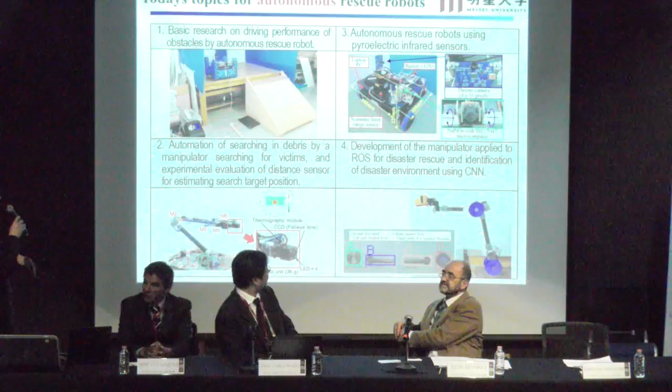In the future, research and development of autonomous rescue robots is necessary. Today's topic is autonomous rescue robots - four topics I will explain. The first one is basic research on driving performance over obstacles by autonomous rescue robots.

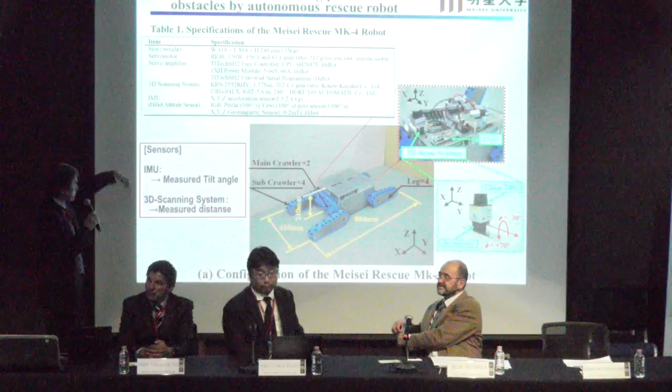This figure shows the configuration of the rescue Mark IV robot. It has sensors: an IMU that measures tilt angles of the robot, and a 3D scanning system that measures the distance from obstacles.

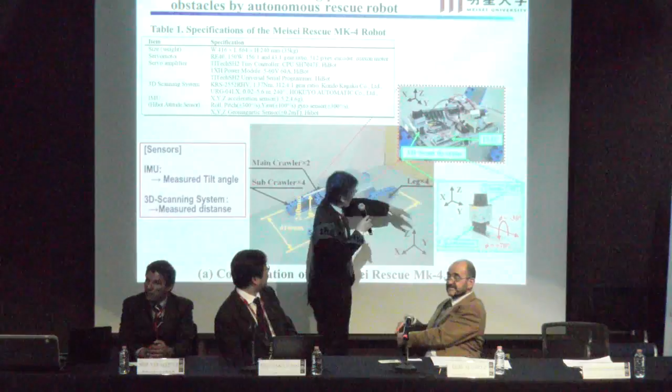This is a 3D scan system, and this is the scanning sensor.

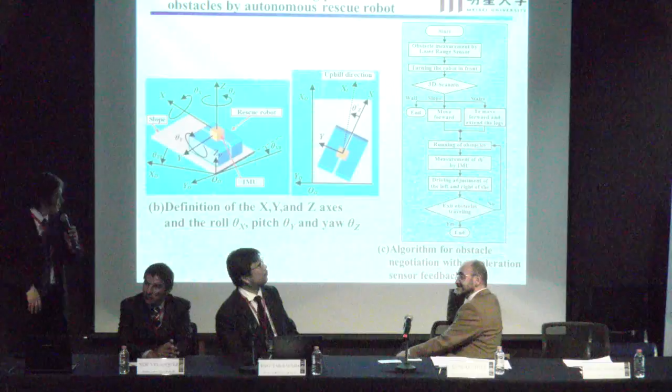This figure shows the definition of X, Y, Z and rotation. This algorithm shows the autonomous climbing algorithm using the 3D scanner and IMU sensor.

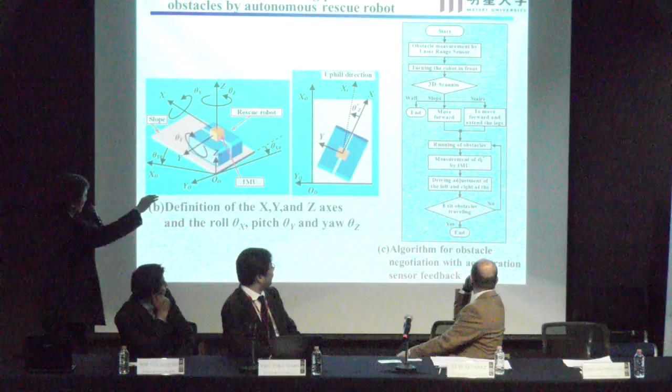This movie shows the basic research on driving performance over obstacles by autonomous rescue robots. In this case, we use the IMU, but also without IMU control. First, the 3D scanner measures the slopes and decides the slope angle.

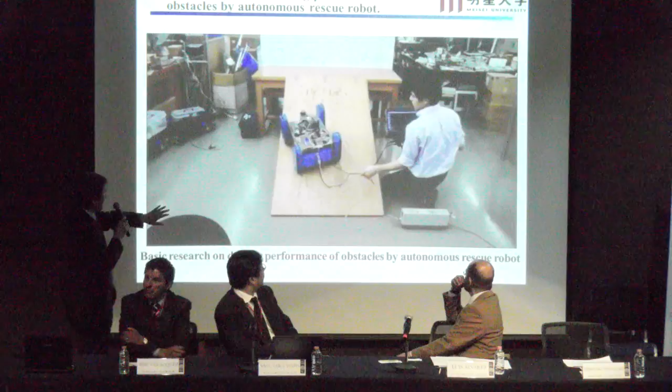Next step, measuring 3D data. Next step, climb the slope. But in this case, we do not use the IMU - it sweeps, then turns to the left, and finally drops from the slope.

Then we try IMU control to automatically compensate the direction. He is my student, he is holding the computer but not operating it - it autonomously compensates the direction to climb the slope.

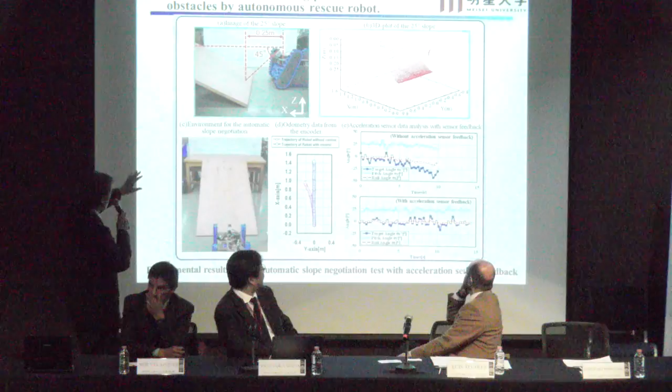This is the result of the experiment. Next, we try going from the top of the stairs down.

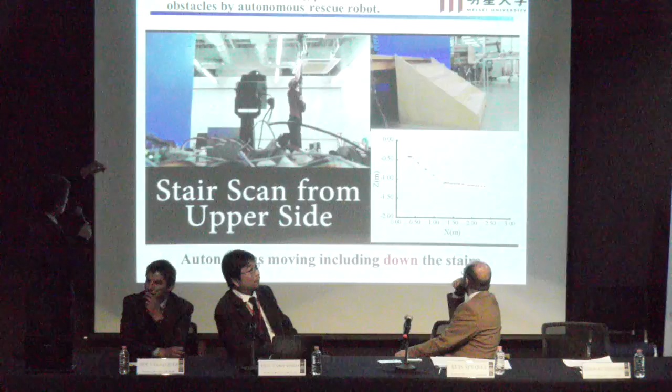This is shown 20 times quickly - autonomous moving using the 3D scanner, measuring from the top to the bottom of the stairs and the form of the legs.

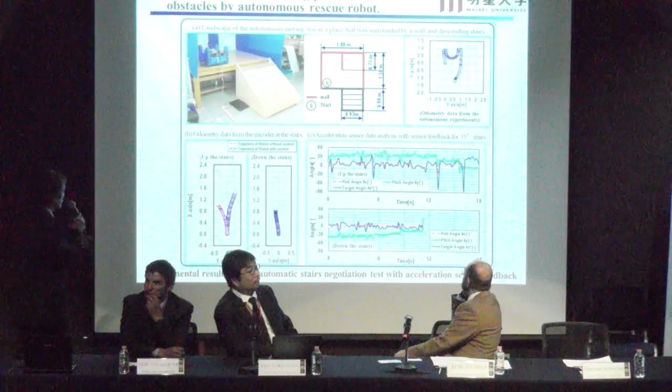And this is real-time data. This is the result of the autonomous stairs descent, and this measuring data is very good.

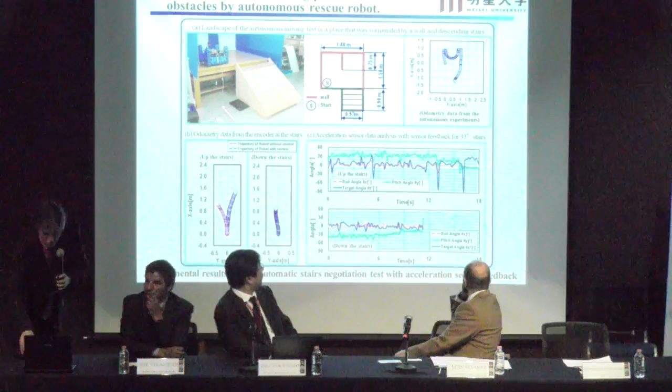I will now show the second topic. This figure shows a manipulator developed at Meisei University. The title is Automation of Searching in Debris by the Manipulator, Searching for Victims, and Experimental Evaluation of a Distance Sensor for Estimating Search Target Position.

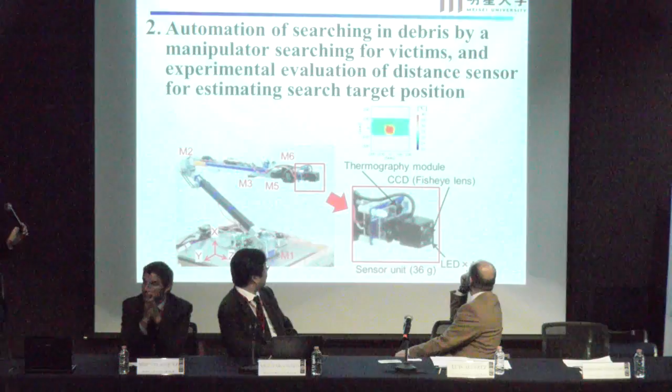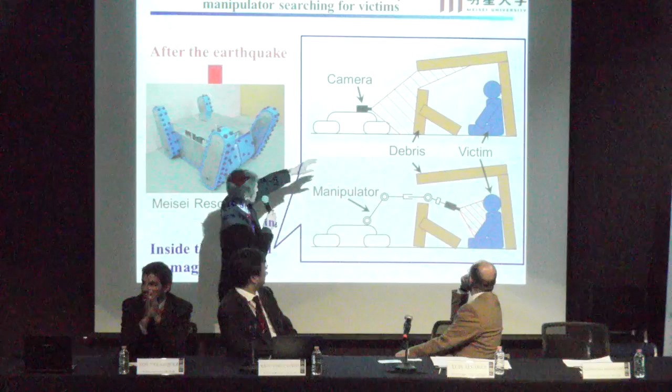After an earthquake, if we use a rescue robot inside a damaged building, in such cases only a camera makes it impossible to look inside the debris. If a victim is inside the debris, it is necessary to use a manipulator.

In this case, the rescue robot and control PC used wireless LAN control. This is a simple example with a box. The problem is we cannot recognize depth, only two-dimensional data visualization.

It is very difficult to manually insert the manipulator quickly. As a solution, we proposed using a distance sensor to automate the insertion operation.

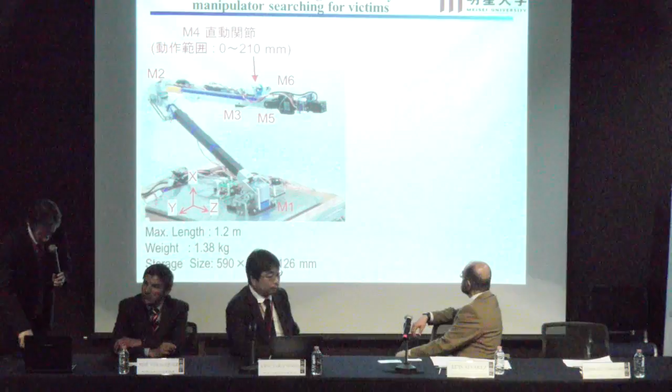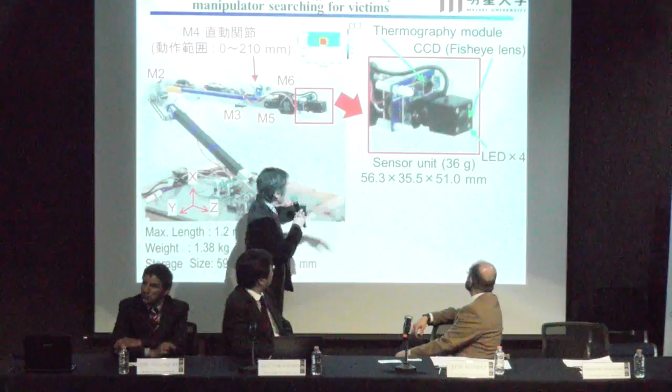This figure shows the 6 degree-of-freedom manipulator, weighing 1.38 kilograms - a very light manipulator. The head has sensors including thermography, which can measure temperature.

The sensor unit is only 36 grams, with LEDs numbering four. This is the scene of examining and scanning the holes.

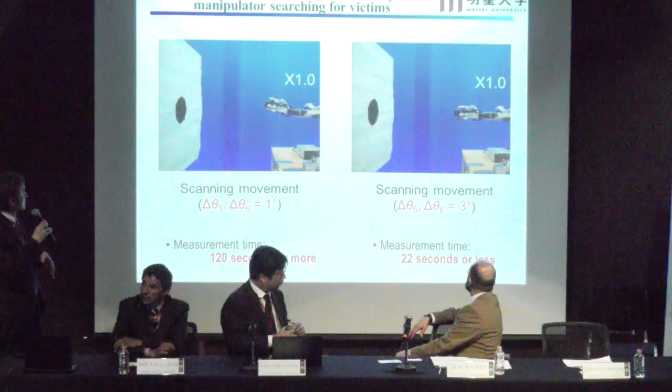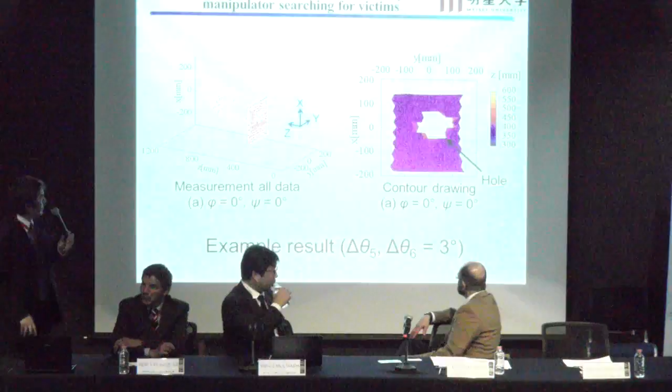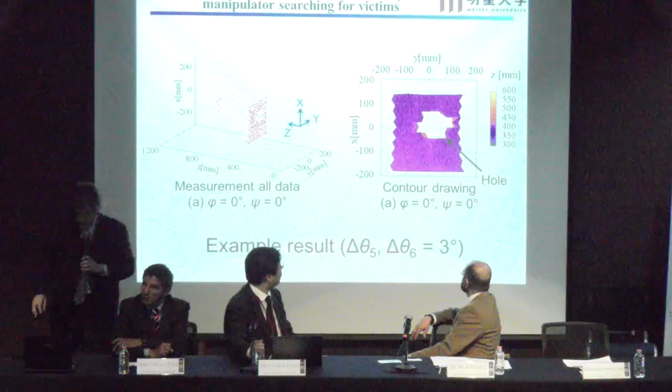In this case, in about 22 seconds it is possible to search the holes. This is the result of the measured data - we can see the hole. Next, we try to autonomously insert the head.

In this case, a distance sensor looks for the surface and autonomously finds the hole, inserts the head, and tries to reach the victims.

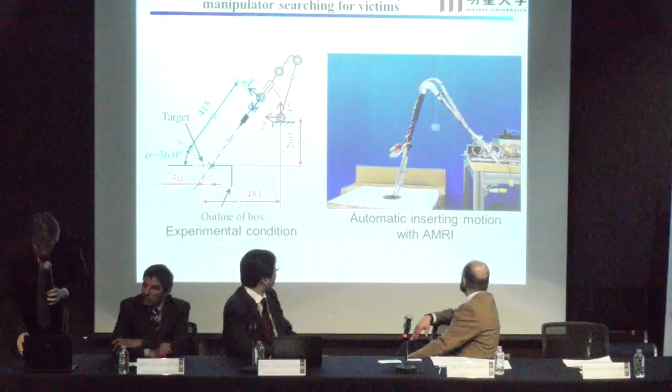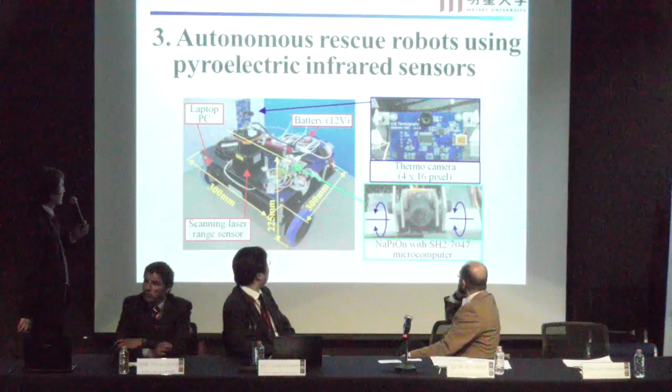This is an outline of the rescue robot, and this is a thermal image. Here are the hottest spots, but it is difficult to analyze only this data. We propose the pyroelectric infrared sensor to detect a wide range at once.

For a quicker find, we try this approach. This is a heater, and this is the autonomous robot using pyroelectric infrared sensors.

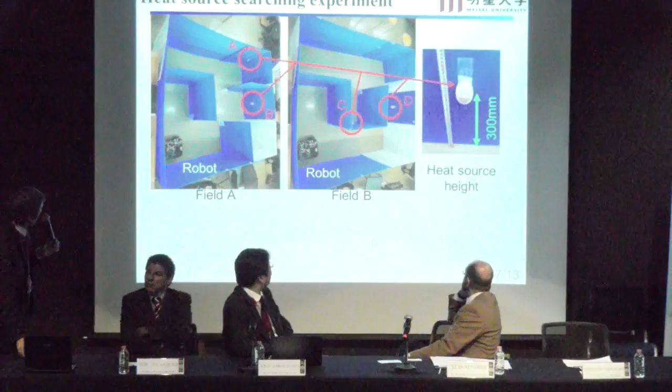First, we tried a maze like this, attached a heat source, and looked for it using this autonomous robot. The result is here.

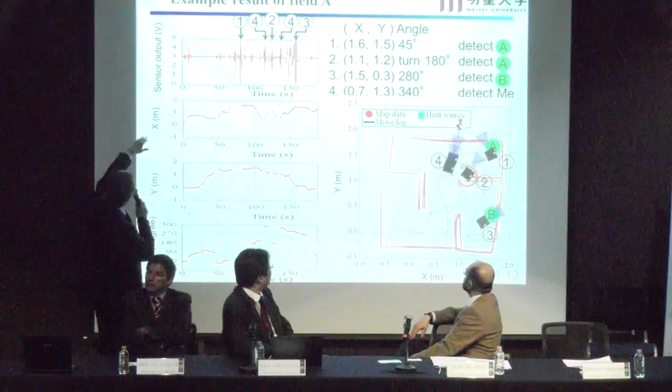The first graph shows the sensor output, numbers 1 through 4, which are heat sources. This figure shows the red dot as map data, and the blue line shows the move log. The result: detect heat source A, detect source A again, and detect source B.

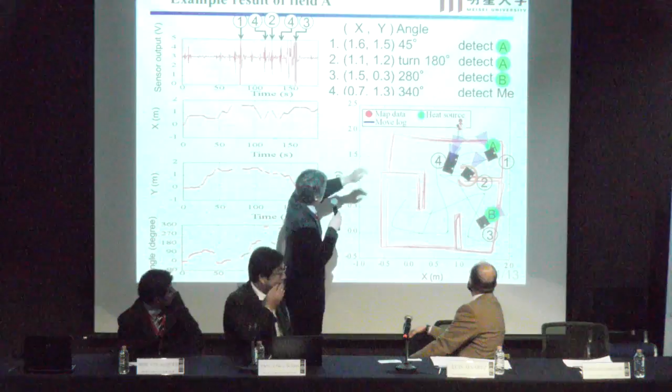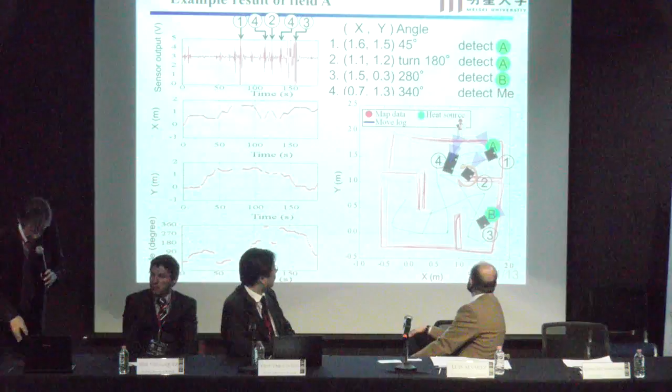And in this case, it's me. I explain here, and the robot finds me.

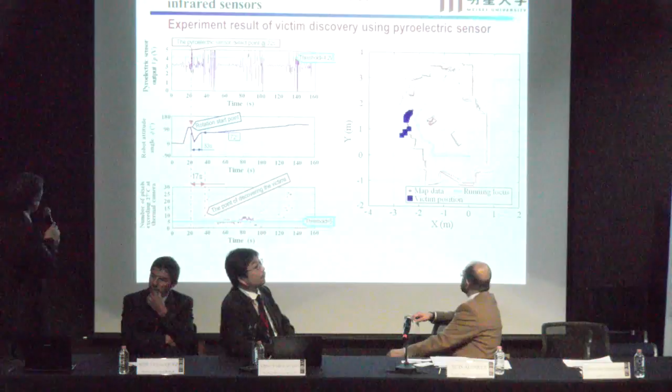This figure shows the result. Time is short, but we detected victims 17 seconds earlier than using only the thermal camera.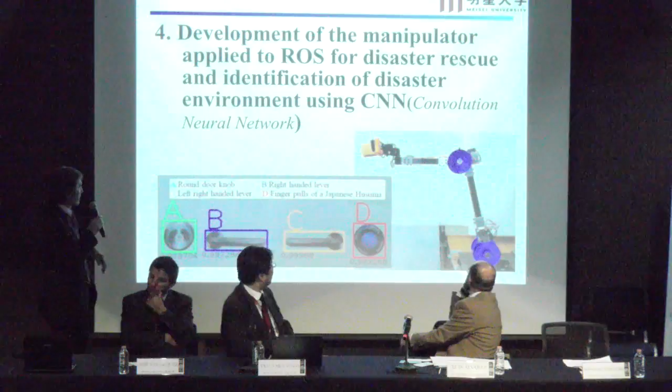That's the result. Topic number 4: we try using machine learning, in this case CNN, to distinguish the door knob.

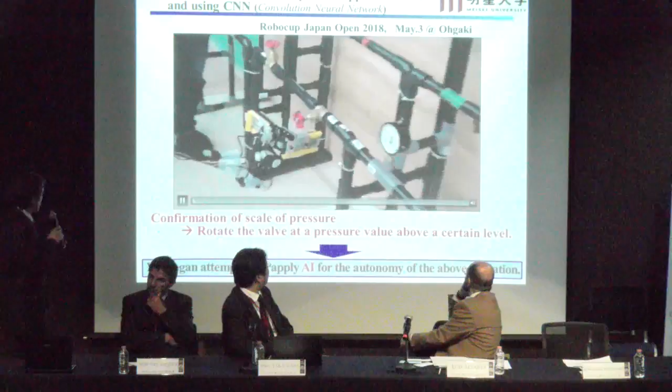This movie shows the RoboCup Japan Open 2018 this year. This is the meter and valve.

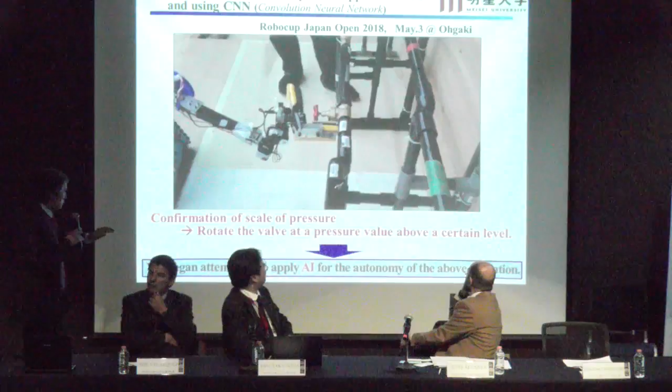In this case, confirmation of scale of pressure, and then rotate the valve, when the pressure value is above a certain level, we try to use AI.

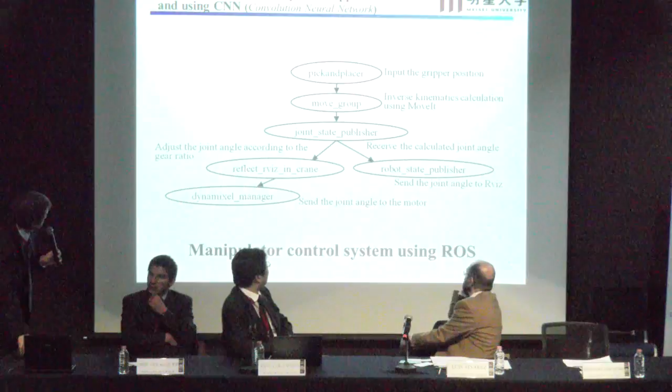This is developed, and this is the algorithm, using ROS moving autonomously. The operator uses the simulator, and the real robot moves like this - very easy.

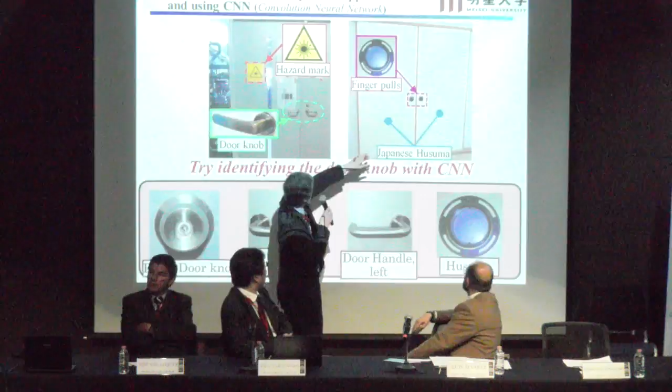This shows the doorknob and Japanese style door, that is husuma, which is sliding. And this type is pulling.

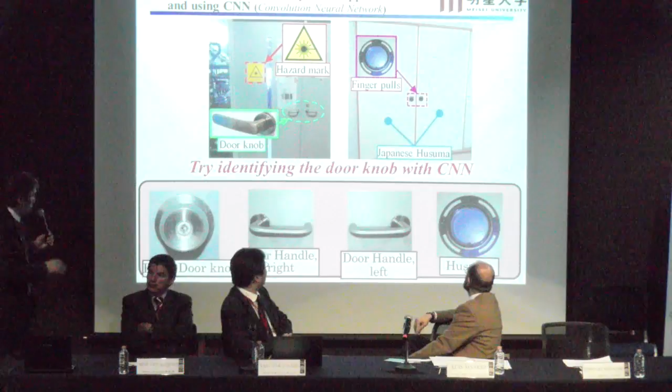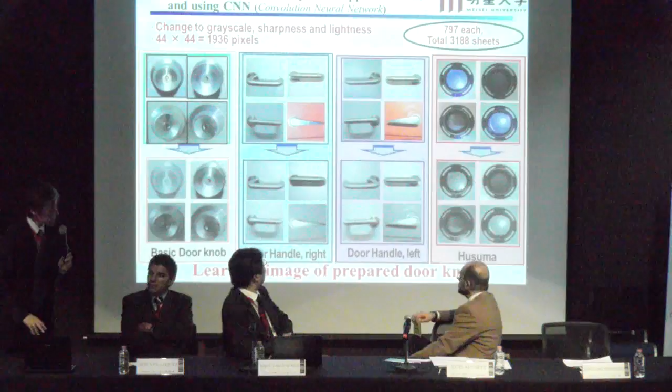A very simple algorithm was applied, and this photo shows the learning images of prepared door knobs.

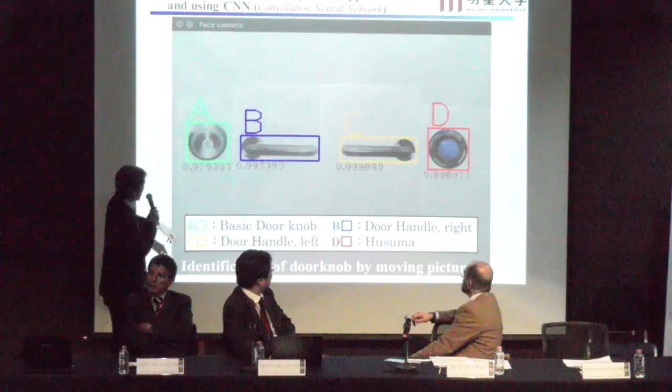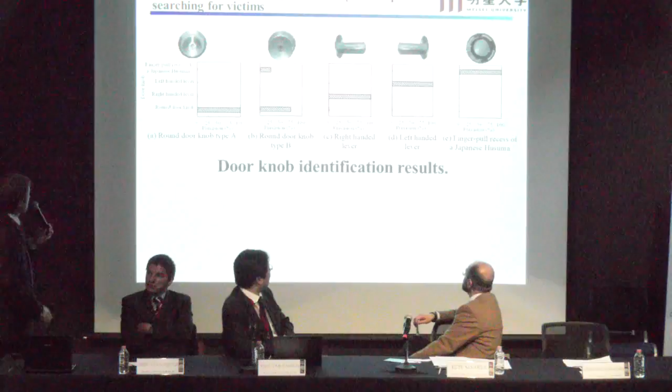All data over 90%, distinguishing A, B, C, D query. This is the data over the result.

Conclusion of today's topics: autonomous rescue robots and artificial intelligence will become indispensable in the future. Still, we are at the beginning of the study.

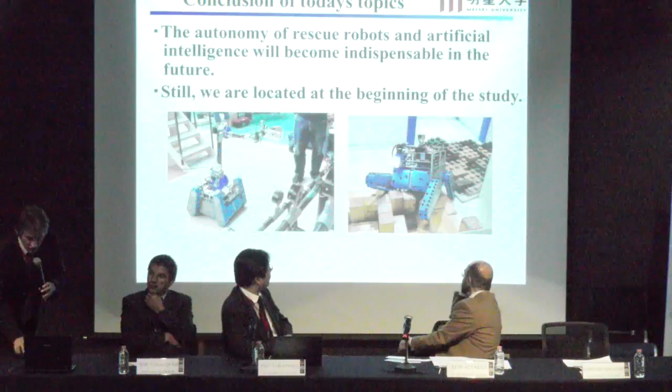A Meisei University rescue team will attend, and from Mexico, Universidad Tecnológica de México. After tomorrow, I go back to Japan to attend this World Robot Summit.

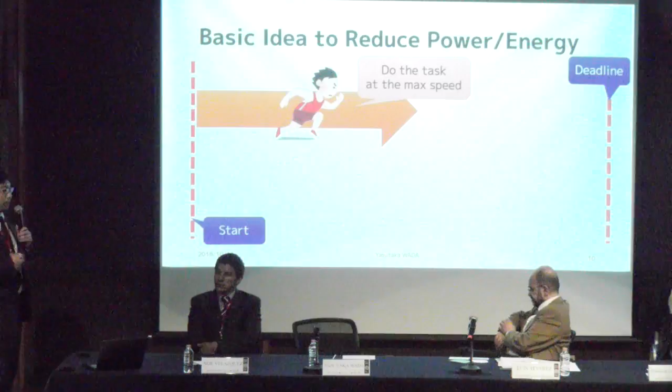Let me show you a basic idea to reduce the power consumption of a computer system. One idea is to execute the program at the maximum speed of the system, and then rest until the given deadline. That's one case. Another case is to make it slower, while still keeping the deadline of the task. This is a simple case, but it's a very important strategy for reducing power or energy consumption. Using a compiler system, the compiler can analyze the program and search for the opportunity to do this kind of thing, applying it while parallelizing the program.

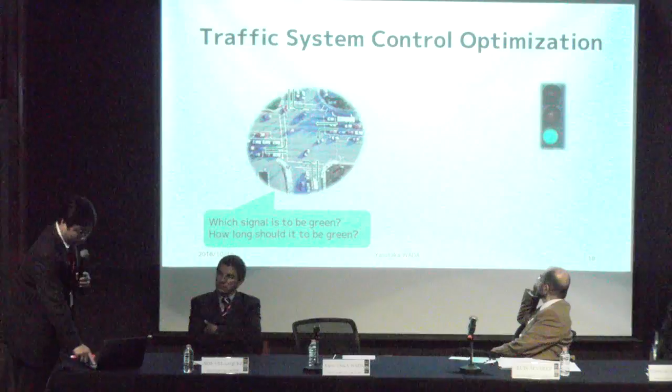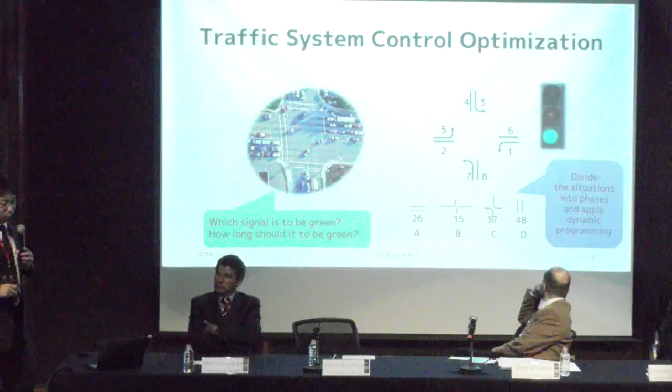In this case, we utilize dynamic programming methodology, so we can divide the situations of the traffic signal into phases, and we name each phase. By using this phasing technique, we can apply the dynamic programming technique, and also algorithmic optimization for the optimization program.

So we can achieve much better performance. If we don't apply the optimization, the complexity of the problem is exponential, but after applying our technique, the complexity becomes more linear, so it's very good performance.

In the near future, we have to make full use of these kinds of computers, but all of them have their own functionalities and characteristics. So we have to think about which kind of program we want to execute on which system, and which kind of tasks should be assigned to which system.

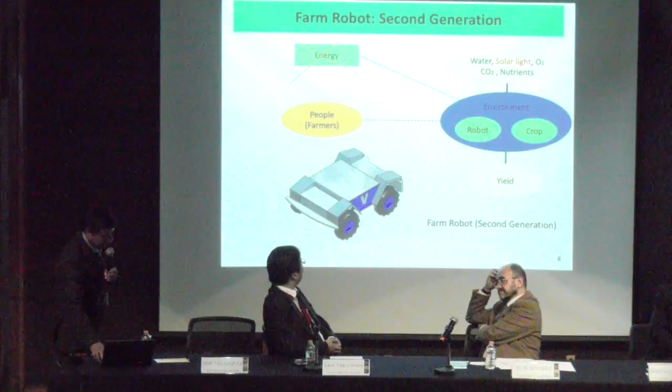The second generation of farm robots is this one, where we already took away the fossil fuel energy, and we use the same energy as the crop, the solar energy. Then we power our robot with this energy, so in the same environment we have the robot and the crop, and also we put in other things like water or nutrients, and we can increase the yield. But here the farmer, or the people, is just an observer of this process. What is the idea of this process?

As I mentioned before, the idea is to use the same energy that plants use to grow. We power our robot with solar light energy, and as there's more light in the field, crops grow fast, but weeds also grow fast because of the good light conditions. So the robot can go inside the cultivation and cut small pieces of the weeds, and these pieces go back to the soil, where they decompose with organisms into organic matter, which helps increase the yield.

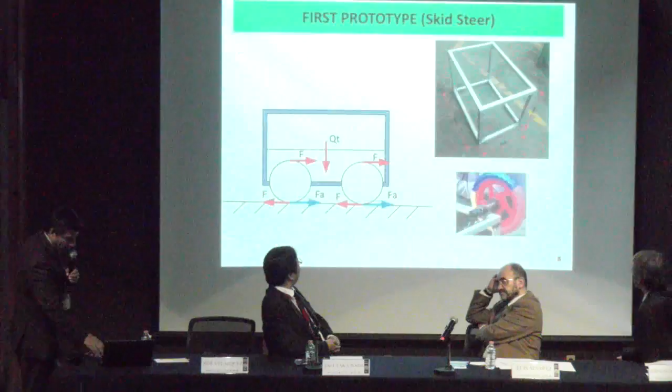With these ideas, we started developing this robot in 2014 at Chapingo Autonomous University. It was a basic robot because we had no funding at that time, so it had to be as cheap as possible. Even the students had to buy the motors and everything themselves.

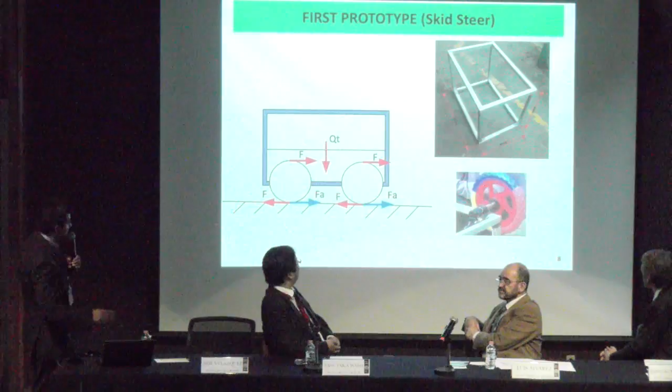We did some simple calculations of how much load we could carry and how much thrust the engines needed to move, and then started building it. We tested some drivers, since our background is agricultural engineering, not electrical or mechanical engineering. So we started from the basics: how to turn on the motor, how to change its direction, how to increase velocity, and how to reduce velocity.

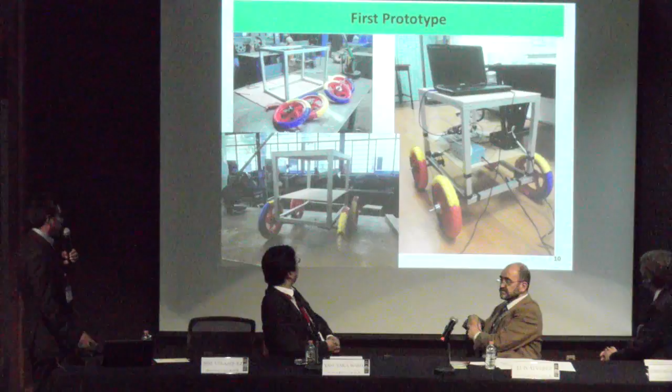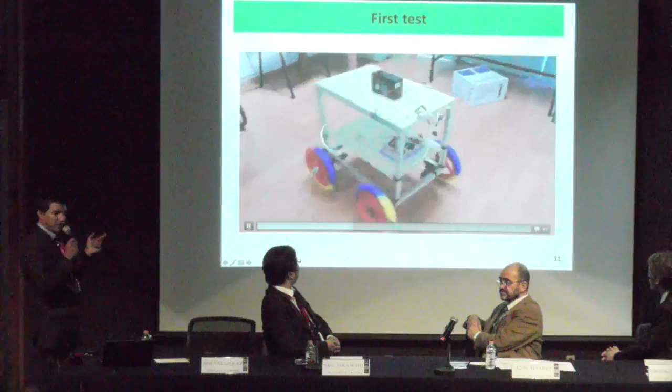We came up with this first prototype and decided to use a skid steer vehicle, which is very easy to control because there's no steering direction needed - it can turn very easily on the same axis.

At this point, it moved, so we took it to the garden at the faculty. It should turn faster because one side's velocity is slower than the other, but as you can see, there wasn't enough power to move it properly. From this first step, we got recommendations: use more efficient motors, reduce the size of the vehicle, improve the mechanical design, and so on.

We're also using the MPU and the IMU, as the Professor mentioned in his rescue robot. Our sensors are actually very similar.

So we came up with the design and construction of version 2 of the robot, also with no funding, because in Mexico it's very difficult to convince people that we probably need this technology. We decided to design, construct, and evaluate an autonomous vehicle for monitoring and agricultural work.

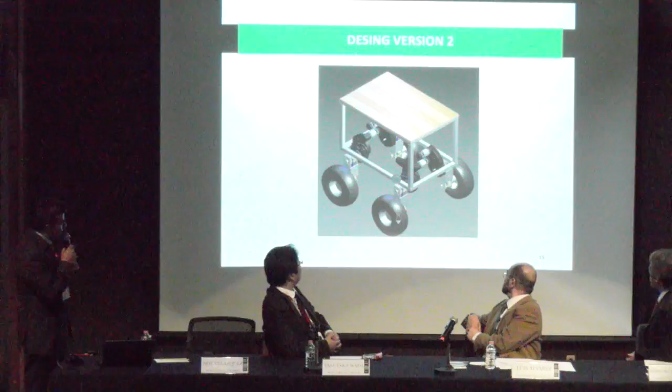Here's the design. The main feature is that we put the motors in a head position, and then transmit the power to the tires by a chain. We went back to the field and reconstructed everything, making some pieces especially for this robot.

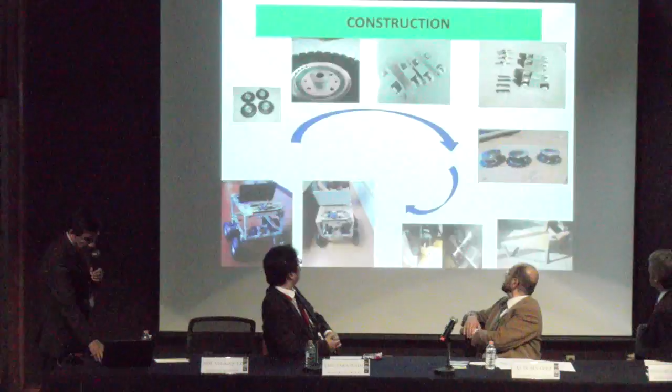This is the main control. The motors you see here are actually from power wheel toy motors, but these are very good - they're 80-watt power wheel toy motors with a reduction gear that allows for torque, so the robot is very powerful. We're using Arduino because it's very cheap and very easy to get here.

The main thing we're using is a computer vision webcam that allows for autonomous navigation. Here's the algorithm - I'll go further into this navigation later.

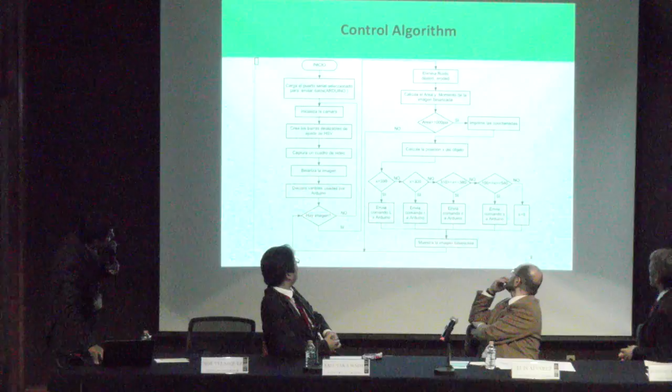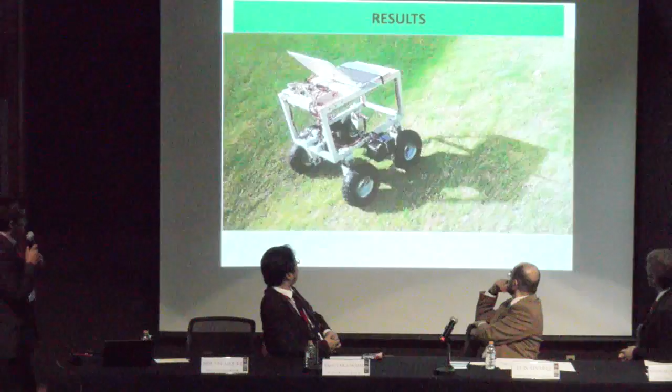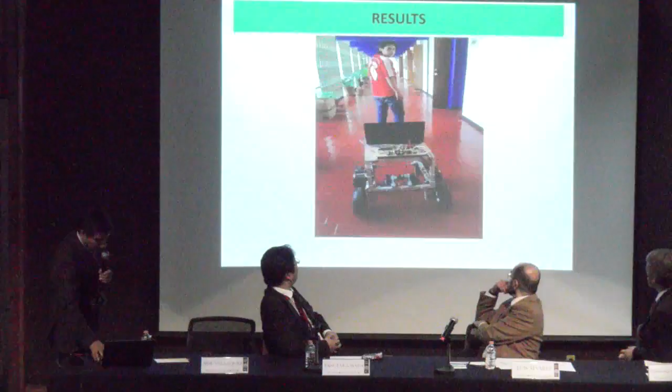Once we developed this, we could start developing mechanisms and implements for agriculture and labor. The first thing we did, because it didn't cost money, was an application for following someone.

We're not controlling the velocity of the robot - if the guy moves too quickly, the robot will lose him. So right now, it's just following with programmed velocities, but it's working quite well. As I said, we're using the webcam of the computer for this task.

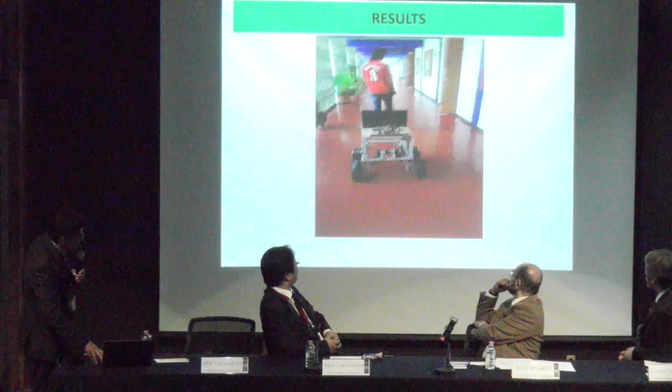Then, as I said, we came to the implements: a computer vision system for disease detection in some cultivations we're working on right now, spraying for pesticides and fungicides, and application of alternative energies in the robot.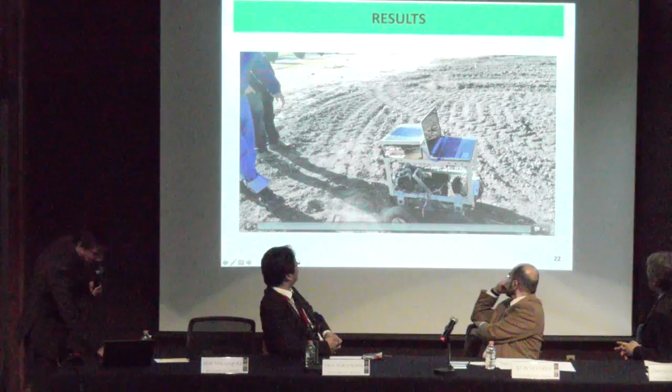And as you can see, it didn't work. Everybody was very worried, especially the student going in front of the robot, because you can see it's not tracking well since it's a rigid system, and we already have a seeder machine installed in the middle part. You can see his worried face because he was working on his master thesis and we had to start over again.

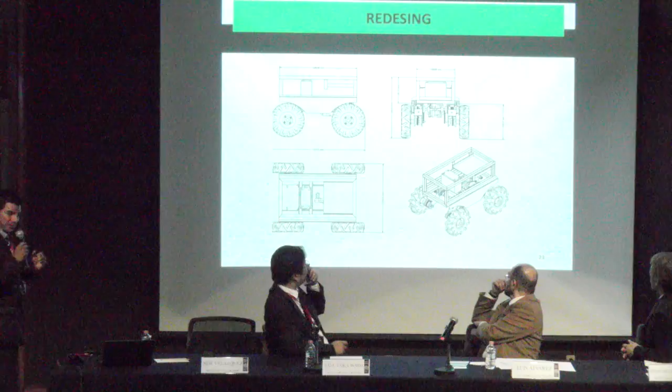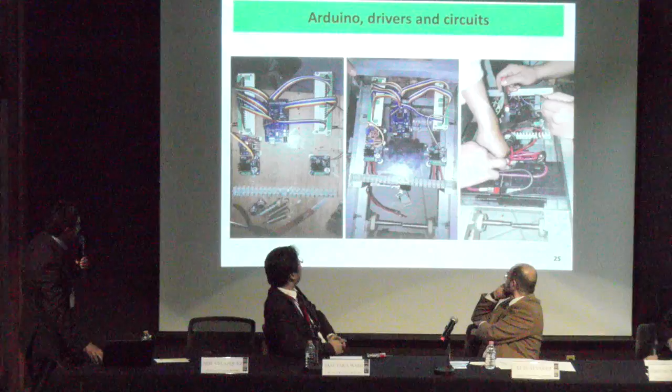This shows that we were doing something wrong, so we redesigned everything. We put in suspension and 4-wheel drive in the robot. We started over again with the circuits, and we came up with this third prototype.

We also changed the tires, so these are agricultural tires, special for agriculture. And of course our pets over there. But as you can see, we don't have problems turning now, and it's moving very well in the field. That's why we wanted to make this. It took us 3 years to get to this part, especially in the mechanical design, until we came here.

We also worked on the mathematical model for controlling velocities of this robot. It's quite easy because this robot is considered rigid, and we don't have changes in mass position in the robot, unlike the one I previously showed you in my first slide. So this is the mathematical model for controlling this robot.

Then we developed software to autonomously navigate between corn or between any cultivation. We are using a webcam, as I showed you before, and now you can see the suspension working very well. It's independent suspension in this robot, and it's navigating autonomously between the rows of the cultivation.

The main point here is that our vision system adapts to light conditions automatically. So if the sun goes away and it becomes cloudy, the light conditions change, and then if the sun comes back again, the light changes again, but this system adapts automatically to that.

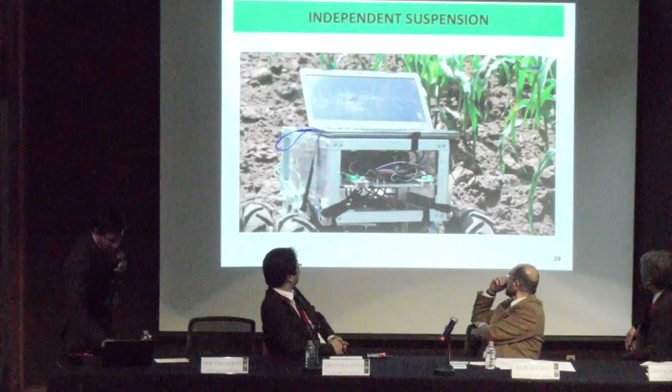And we also tested it in bad conditions. At least maybe we can compete with you in the rescue robots, I don't know. You have to take it to see it, but I think it's very good at this kind of terrain, not just flat slopes, and it's working very well mechanically.

This is the software we have developed, and this is actually a video taken from the robot while it was navigating through the corn. You can see the red dot there - it's calculating the center of the rows, and then if the dot is left or right, it decides to go left or right to correct its guidance automatically.

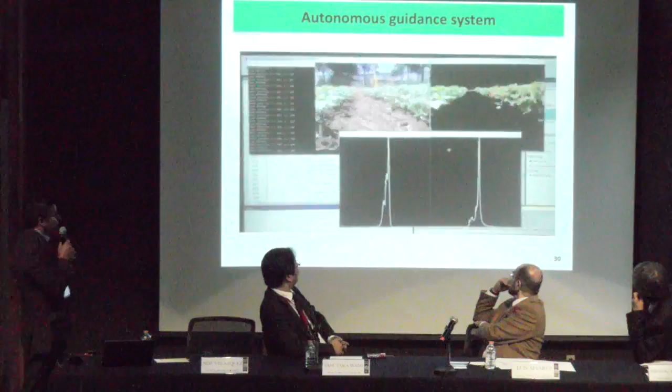I repeat, we are not controlling velocity at this point, but it's working very well and it's autonomously guiding into the field. With these things, we can already do many things like monitoring, fertilizing, or even harvesting in the field, and this system is working quite well.

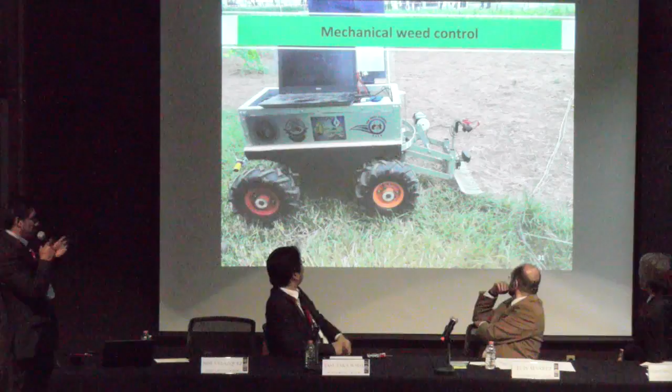This is also a multitasking robot, so we have designed some mechanisms. This one was designed but didn't work well - it's for mechanical weed control. It was actually tested in the competition we participated in, in Germany this year.

We have developed a fertilizing and seeding machine, and also an autonomous spraying system that is here. If it goes autonomously, it can spray pesticides or fungicides autonomously. We think with this system we can reduce the amount of pesticides or chemicals we use in agriculture.

We also developed this seeder and fertilizer machine, using the same mechanism for fertilizing and putting seeds in the soil. This is a demonstration, but you can see that it's working very well. You can move the motors faster, and then it can put more or less fertilizer and seeds into the soil.

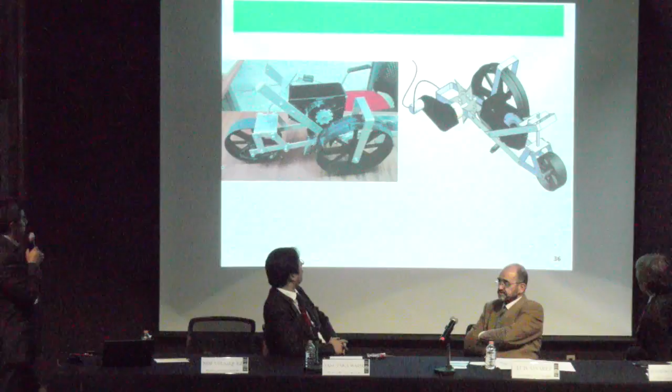We are also working on a larger one - we bought this commercial seeder for larger grains like maize or beans, but it didn't work, so we are redesigning this. I have one of my students working on that right now.

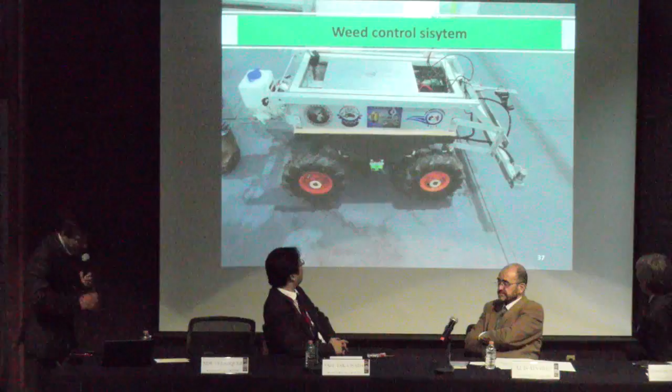And recently we are also developing a weed detection autonomous system for weed control. We just started this last week - it's our first test.

You can see that it detects the plant and then sprays something on it. We're still working on the control, but it detects the plant with the same vision system, and the system was very cheap actually. So this is what we are working on right now.

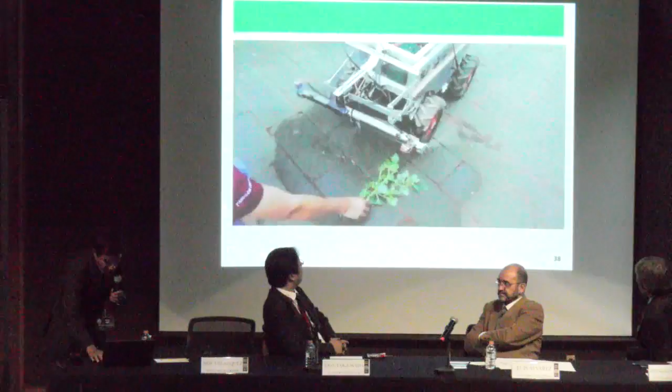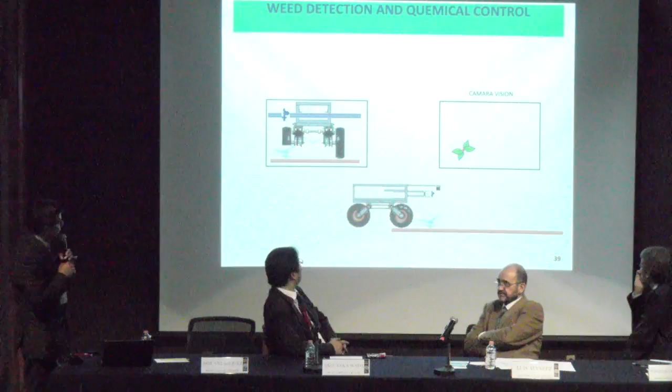We also did a test while the robot is moving. It will go moving, and then it will detect the weed. Then we move the sprayer, and apply some chemical herbicide.

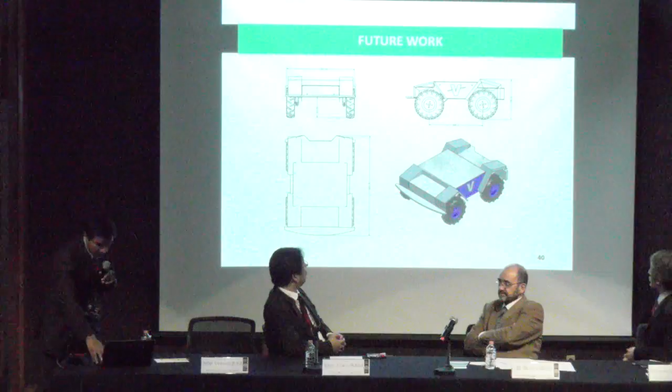Right now we are working on two more versions because a Mexican company came one month ago, and they want to build a larger version of this robot for orange and lemon. So we're designing a larger robot for them, and they want to build it by the end of the year. They also want a smaller version of this robot with the same platform.

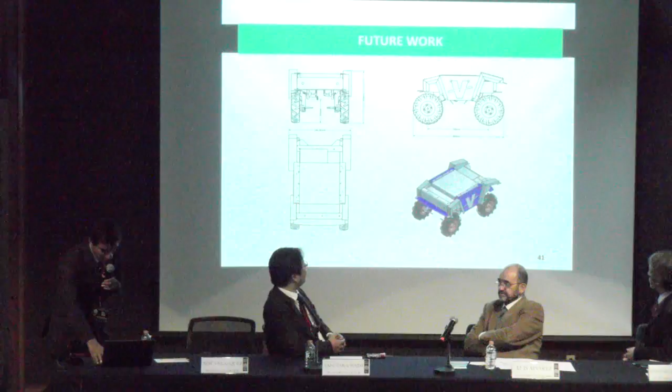The development algorithm is very robust in light conditions. It automatically adjusts for these lights. This also allows for autonomous navigation in the robot, and a cheap solution for autonomous navigation was developed. This is the first point we have done, and we are developing some implements and other development at this point. So thank you very much.